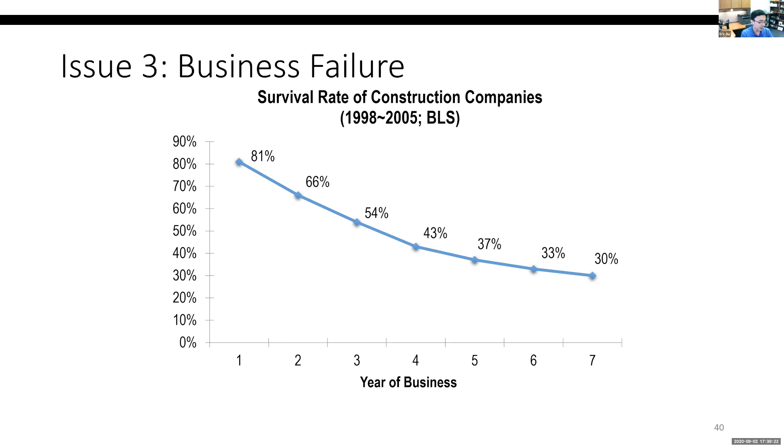Issue 4, claims. Once again, this is based on literature. 52% of construction projects will end up with at least one claim of some type. What is the last phase of a construction project? Lawsuit. So is that normal? No, it's not normal.

Profitability, all right, this is the magic. When a company tells you, hey, you know what, I'm so proud of my company, my annual revenue is $10 million, no, leave that guy immediately.

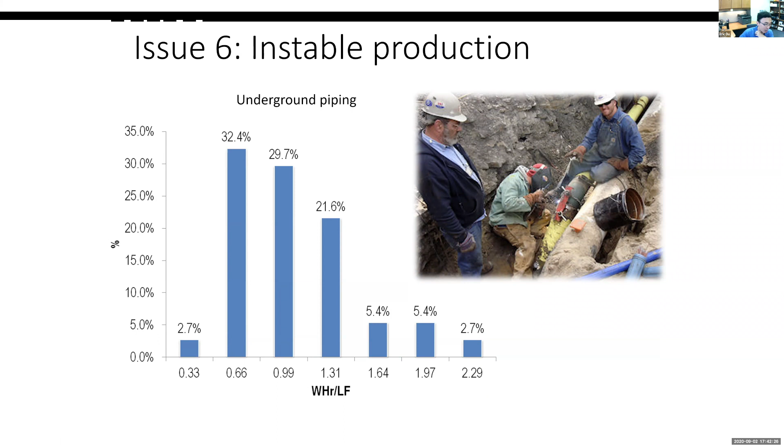This one shows the production rate for underground piping, how to bury the pipes underground. This is hours per linear foot, how long it will take. This is the distribution from 0.33 to 2.3. This is like 7, 8 times longer than this project. How would you predict the duration of a project? But where's the problem? Why are we seeing this so volatile production rate?

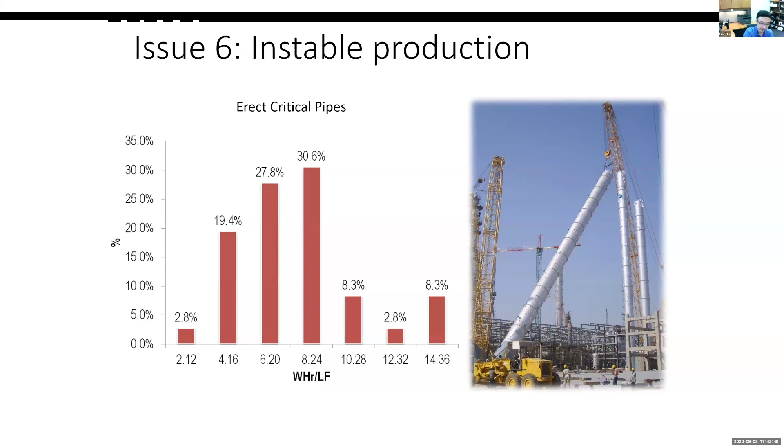This is an example, to erect the critical pipes, from 2.12 to 14.36. Once again, about 7 times — the slowest project is about 7 times longer than the fastest project. Why? I don't know, but there's a problem.

Safety, and not surprisingly, construction is still among one of the most dangerous jobs in the US and also all around the world. And whenever there's a recession, construction is always the most affected and the slowest to recover. Guys, we are experiencing another recession now. COVID-19 has significantly affected construction, even though we don't see that now because we still have a lot of contracts to finish. But I guarantee you, next year, you will see a significant decrease in the construction market because owners won't have funds to support new projects, since nobody wants to buy new homes, right?

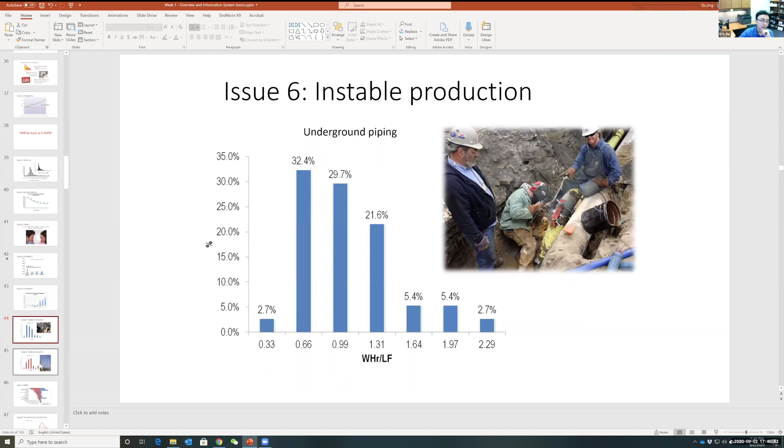All right, so guys, think about the problems we just talked about: decreasing productivity—we used to be a better industry than manufacturing in terms of productivity. We are experiencing significant overruns, significant business risk, a lot of lawsuits and claims, very low profit margin, very unstable and unpredictable production rate, very unsafe, easily affected by the economy, and very difficult to recover. No young man wants to go into the industry, and there's no innovation. Where's the problem? Like I mentioned, it must be some systematic problem. And personally, I have a lot of answers, I have to say.

Now think about how new technologies would improve everything, okay? How technology can be used as a solution to that. Before I talk about this, I think it's boring to just go over data and basics, so I'm going to adjust the sequence of my class and skip ahead to this: Industry 4.0 and cyber-physical systems. Why? I think we are facing a historical opportunity today to solve all the problems we've faced in the construction industry for more than a century. This is Industry 4.0, and when we talk about Industry 4.0, the major thing is called the cyber-physical system. So what is a cyber-physical system? I'm going to play this video quickly.

Your next refrigerator may know more about your diet than your doctors.

Can you hear the sound of this video? Okay.

How many objects do you have that are connected to the internet? About a decade ago, you probably would have said one or maybe two if you were an early adopter of smartphone technology. But today, well, I've got a work computer, a personal computer, a tablet, a smartphone, a video game console, a media player, a smart TV, I even have a smart refrigerator. Now, extend this trend outward, and what do we get? It's estimated that by 2020 there will be 50 billion objects connected to the internet—that's billion with a B. It's also estimated by the US Census Bureau that there will be 7.6 billion people alive at that time. So that means for every person, there will be 6.6 objects connected to the internet.

We're talking about a world blanketed with billions of sensors. These sensors are taking information from real physical objects in the world and uploading it to the internet. It's a world where your environment transforms as you walk through it, because technology you may not even be aware of is monitoring your every move. It's a world that's constantly changing all around us due to these sensors and the internet, and we call it the Internet of Things.

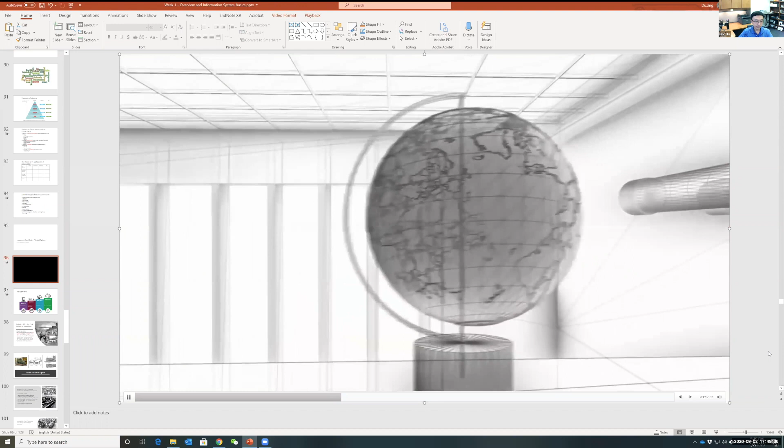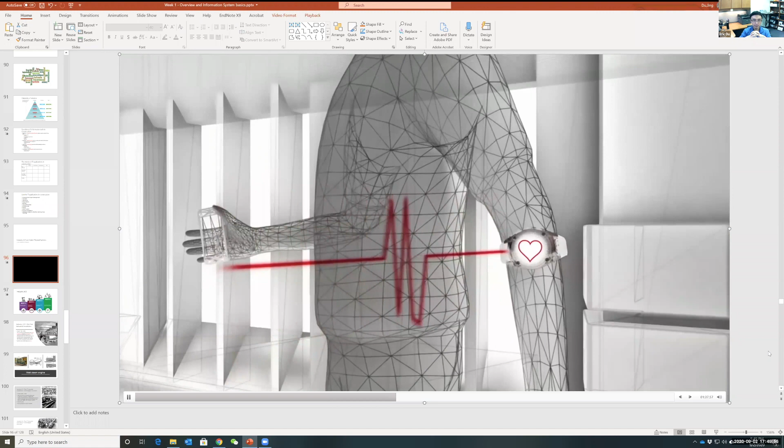Let's stroll into the living room of the future. Immediately, this room identifies you and taps into a cloud-based profile of preferences like climate control, music, lighting, and decor. Had a long day at work? The room knows, based on the calendar app on your phone and biosensors that detect stress via blood pressure and heart rate. So it turns off the rockabilly surf guitar you usually listen to and switches to more soothing classical music. From environmental sensors outside, and maybe even worn within your clothing itself, it knows it was snowing earlier, so the climate control begins to crank up the heat in anticipation as you walk through the door.

On the software side, we're talking about algorithms so sophisticated they may be able to predict what you want before you know you even wanted it. So when you walk to the refrigerator, it tells you not only what's in there, it tells you what you can make with the stuff you already have. And it's already telling you what's inside and what's the perfect meal based upon your mood, your activity level, and maybe even your weight loss plan for some of us.

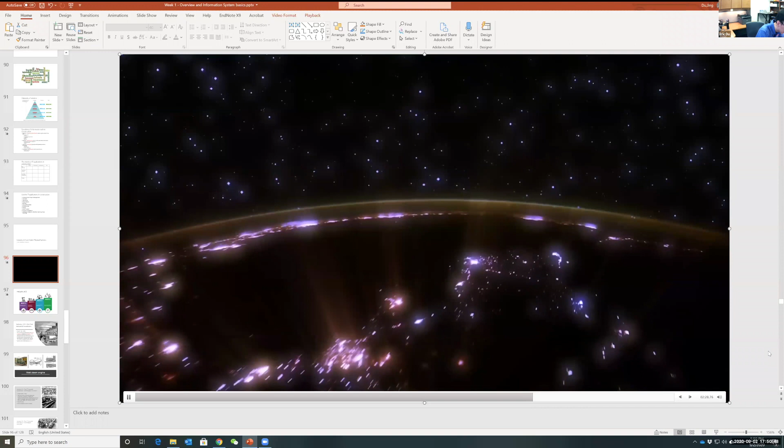As for how many objects could be connected to the internet, consider this: the latest version of Internet Protocol, IPv6, creates more potential addresses than there are atoms on the surface of the Earth. So we're going to live in a world completely filled with sensors, with data, reacting to us, changing every moment dependent upon our needs.

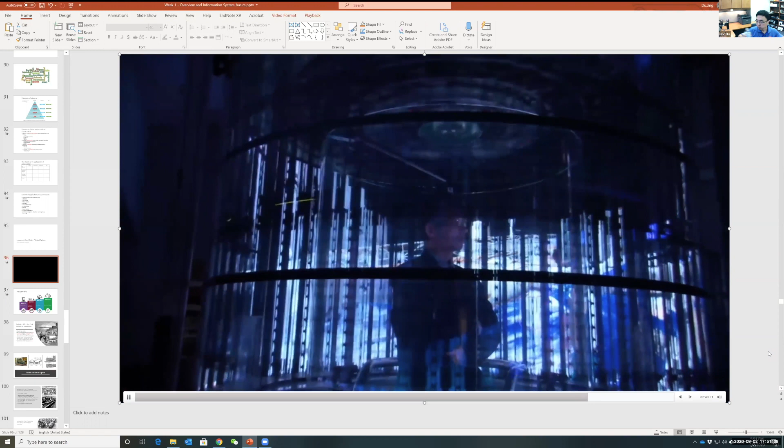I'm no longer going to be asking you, hey, what's your favorite color? What's your favorite music? I'm going to ask you, what's your reality like? I know what mine is when I walk into my house, how the world reacts to me, but how does it react to you? This is more than philosophy, more than technology. It is altering reality as we know it. And it's all regulated by the Internet of Things.

How many of you have heard about the term Internet of Things? I have, you have. So why is this important?

You know, Internet of Things are cyber-physical systems. I'm going to talk about them, they're actually presenting the same thing. It's actually the landmarks, the hallmarks for Industry 4.0. We have experienced so far 4 major industrial revolutions, and each revolution actually changed the entire human society. Industry 1.0, that's about steam engine. Industry 2.0, that's about mass production, especially the Ford T-model cars. Industry 3.0, that's about automation, robots, computers, and electronics. And Industry 4.0, that's about cyber-physical systems, Internet of Things, intelligent machines.

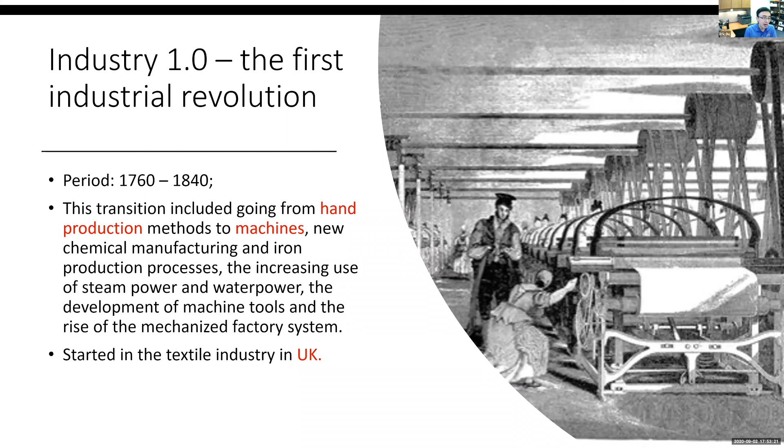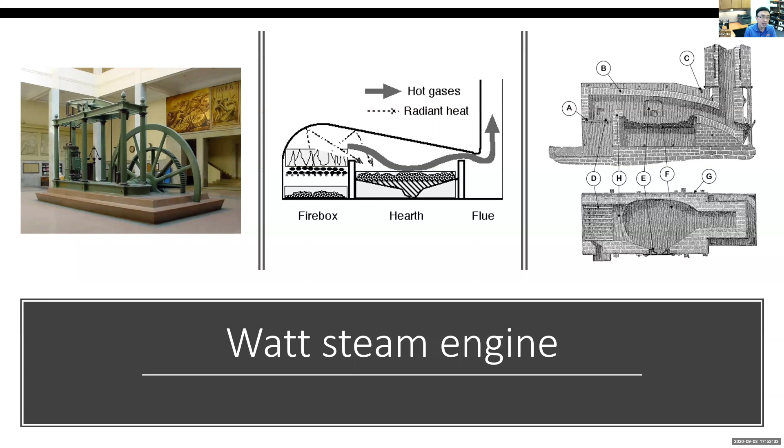It started in the UK in the textile industry, and this is a Watt steam engine. I think everybody learned this in high school, why this is so important. This is the first industrial revolution.

Industry 2.0, or the second industrial revolution, we call this a technological revolution - the first one we call the steam engine revolution. It happened right after the first revolution, in the period of 1870 to 1914. As you can see, each industrial revolution's pace becomes faster and faster, so the duration takes shorter. This one shows the advancements in manufacturing and production technologies that enabled the widespread adoption of systems such as telegraph, railroad networks, gas and water supplies, and the sewer system.

And we have this electrification - we start to use electricity. Around that time, the US started to use street lights, and everybody started to use light bulbs. Right after 1914, Americans started to use air conditioning. So that happened about 100 years ago, the second revolution, and the hallmark of that is mass production. What is mass production? This is a brilliant design, a new way to produce things. Can anybody tell me something about what mass production is?

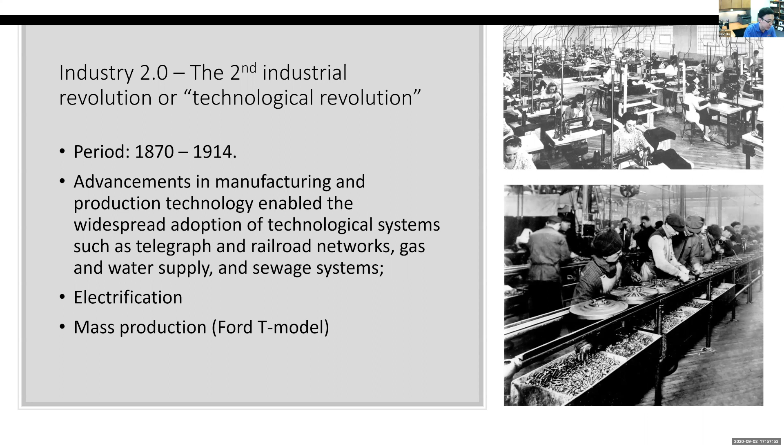Are you guys using iPhone? When the iPhone was popular around 2010, when the ringtone starts, everybody started to get their phone, right? Because everybody was using iPhone. There was a moment in history when everybody was driving the same car, same color, same type, all Ford T models. That's how successful it was in history.

That's the second. The third industry was after World War II, called the digital revolution. We're actually still in the process of the third revolution. It was a huge leap ahead, wherein we invented computers, automation, and robotics. We're replacing a lot of labor work with automation technology. So if we had to use one keyword to describe the third industrial revolution, that's automation, all right?

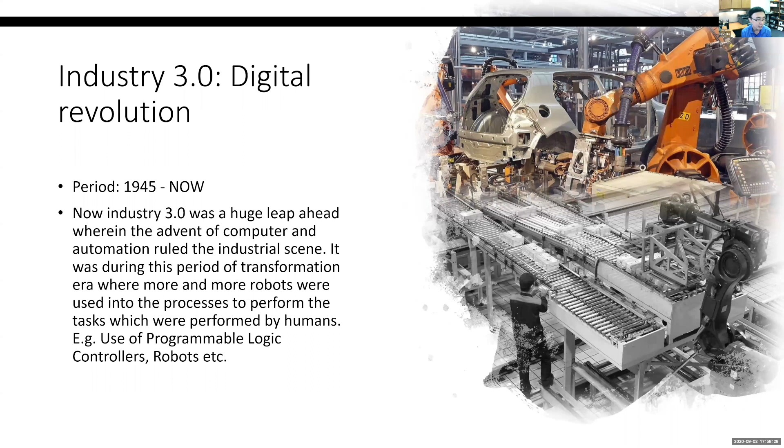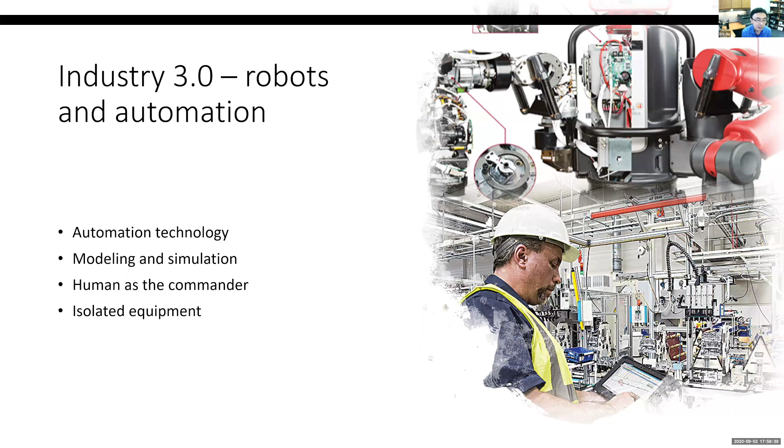So robotics and automation technology, modeling and simulation, humans as the commander, and we have isolated equipment to do a lot of things for us.

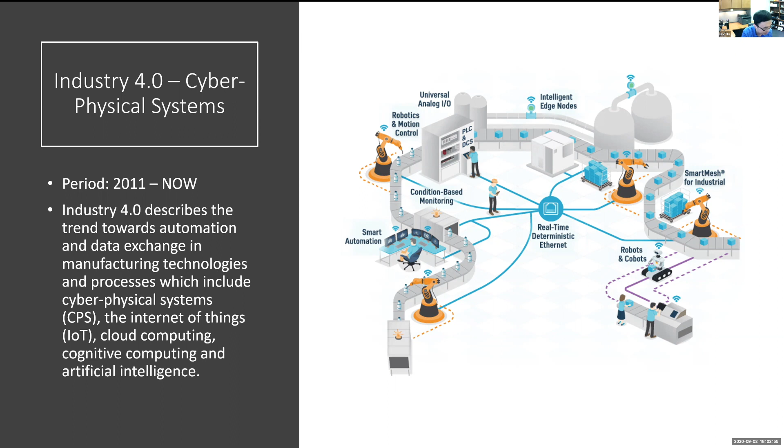So this is what a cyber physical system is. We have the physical system, which is the real world we are seeing now, the natural or human-made systems like roads, bridges, even natural things like rivers, governed by the laws of physics. Of course, we are in the physical world. The cyber system is actually not just software, not just computing, but a model of the real world, all the algorithms that calculate that. For example, if you want to optimize traffic flow, the algorithms for how to optimize the topology of the traffic network will be the cyber system, and the actual traffic network will be the physical system, right?

Cyber physical system is actually a closed loop. We send huge amounts of data from the physical systems to the cyber systems in real time, do the computing really fast on the fly, generate the optimal solution, and send it back to the physical world to change or intervene in the process. This loop happens every single second, forming a continuous loop, and this entire system is called a cyber physical system.

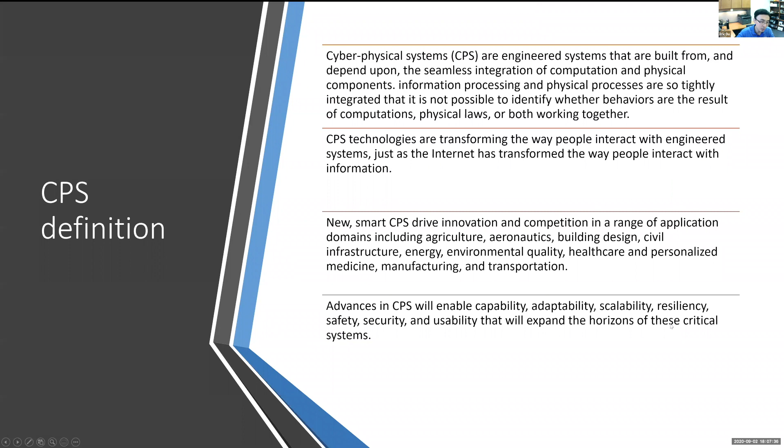Talking about the components of that, like I mentioned, CPS cares about physical world sensing and also the computation of that, but of course also the communication part. So there are 5 components: sensor network, and actuator. This is about collecting information from the real world. This is about changing the real world. So these two are the physical part of CPS.

And we need a communication network to exchange data. We need a computing server to do all the algorithms and all the optimization, and we also need storage to save the big data. All three components here are about the server. So: sensor, communication, actuator, storage, and computing. That's the 5 components of CPS.

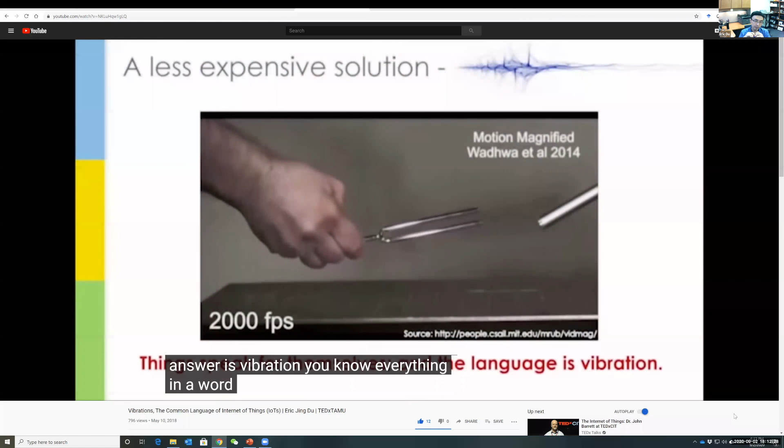So what else can we do? How can we reduce the cost? How can we talk to the things surrounding us in a different way? My answer is vibration. Everything in our world is vibrating. We just cannot see that. The podium, the chairs, yourself, and even this building, they are vibrating.

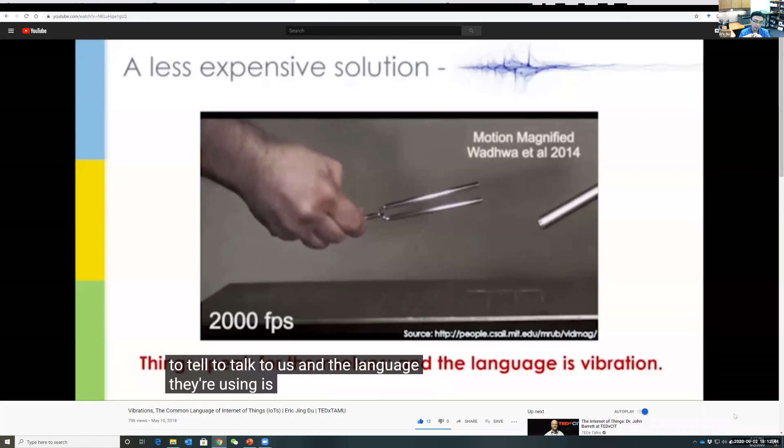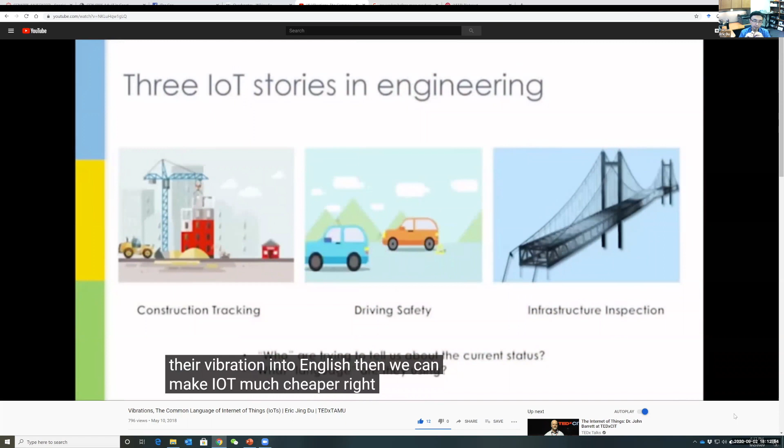So things surrounding us are trying so hard to talk to us, and the language they're using is vibration. That makes me think, if we can somehow translate their vibration into English, then we can make IoT much cheaper, right? So I would like to share 3 IoT projects I'm currently working on: construction tracking, driving safety, and bridge inspection, all engineering applications. The two big questions I would like to ask are: first, what are the things trying so hard to talk to us, to tell us what's going on? And second, how can we understand them?

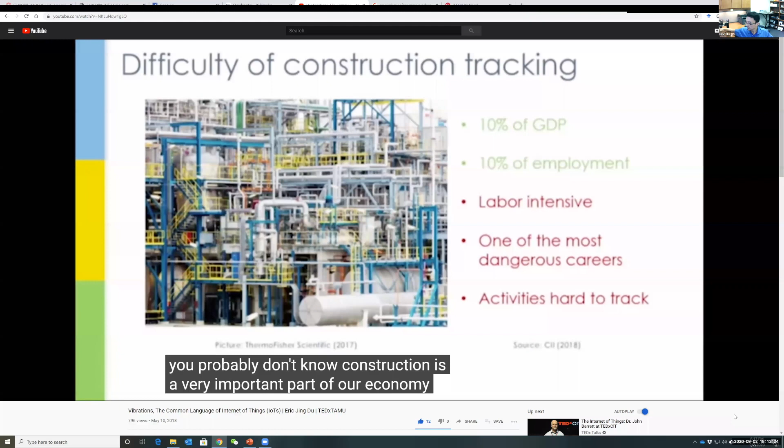Story 1, construction. You probably don't know, construction is a very important part of our economy, representing about 10% of GDP and 10% of employment. But on the other hand, construction is also one of the most dangerous careers in the world. It is super labor intensive. For a big project, you are expecting more than 1,000 construction workers working at the same time. And because of the complexity and uniqueness of construction projects, it can be difficult to track what's going on at the job site. Like this project on the screen, we cannot deploy cameras to track the construction activities. So at present, we usually just heavily rely on the manual reporting of construction workers.

That creates some huge problems about productivity assessment and, more importantly, safety. So what can we do? What are the things trying so hard to tell us what's going on a construction job site?

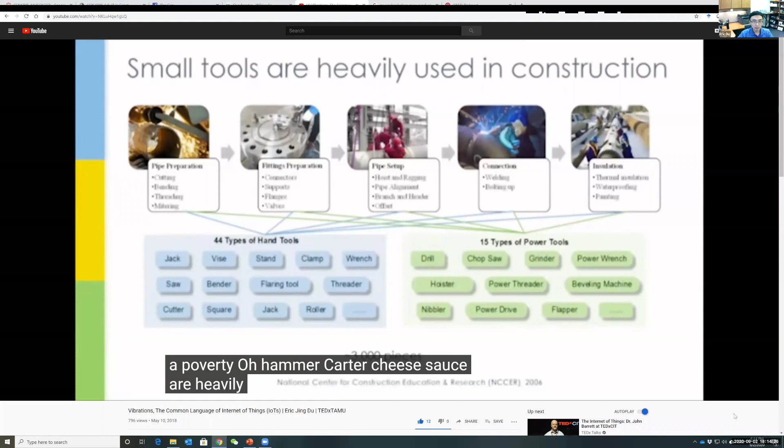Construction tools. Small tools like a power drill, hammer, cutter, chop saw, are heavily used in construction operations. For one project I was working on, there were more than 3,000 pieces of construction tools being used at the same time. Check this map yourself. Don't worry if you don't recognize the tools on screen, because I don't know their names either.

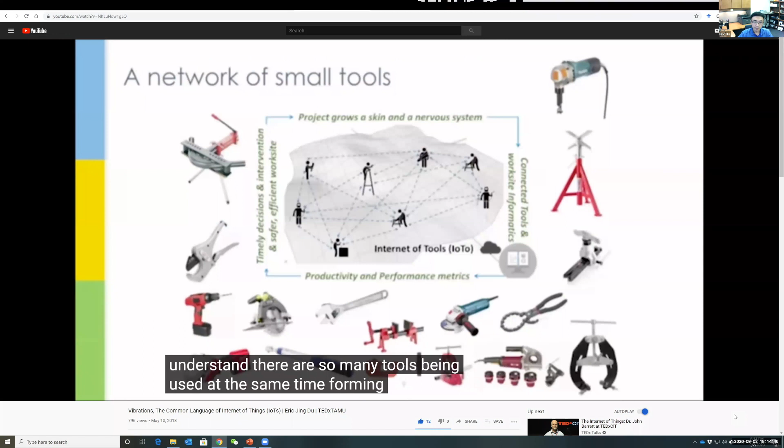We just need to understand there are so many tools being used at the same time, forming a huge Facebook social network. And if we can understand what they are talking about, then we can understand what's going on at the job site. So how can we do that?

Vibration. Different tools are vibrating in very different ways when you're using them. Even for the same tool, like a power drill, when you are drilling wood, concrete, and steel, the vibration patterns can be very different. So in order to identify the difference, we applied a mathematical model.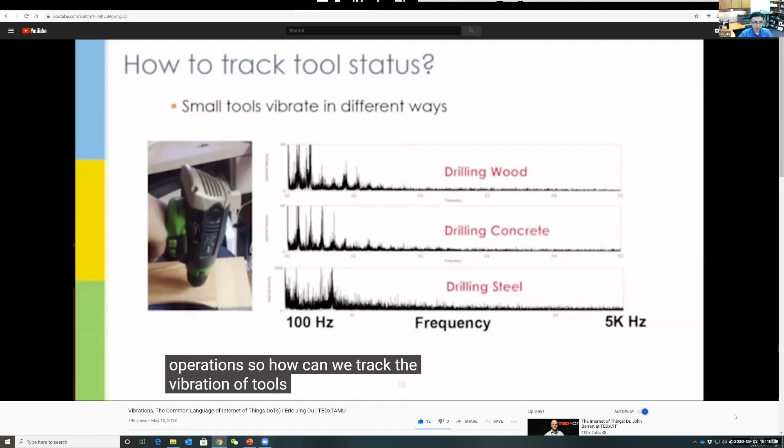So how can we track the vibration of tools? We built a system. This is the sensor we're using. It's very small, but super powerful. It can track 3-direction vibrations at a frequency of 5,000 data points per second.

And it's super cheap, only $2. You can buy it from Amazon. So we just attach this to different construction tools and collected a whole lot of vibration data.

The last step is to plot the Facebook social network of construction tools. Some tools are always being used for the same operation, some don't. It's kind of like, hey, the power drill, the cutter, and the chainsaw, they are good friends. They always want to go out together.

But that hammer, he's a weird person. Nobody wants to work with him. So if you check the social network of construction tools, as well as their individual status, then you can somehow predict what's going on at the job site with all the tool vibration.

Imagine, in the future, there will be a huge heat map in front of a project manager, so he can check what's going on in this area, what's going on in that area. Oh, that construction worker is doing stupid things now, let me stop him. So vibration is the language of construction tools.

The second story is about driving. Let me ask you a question. How many of you have ever driven on a bumpy road before? Great, everybody in the room.

In fact, 22% of US roads are considered in poor condition, and the cost to fix the problem is estimated to be $170 billion. Unfortunately, every year more than 35,000 people die on US roads, and about 14% of accidents can be tied to poor road condition.

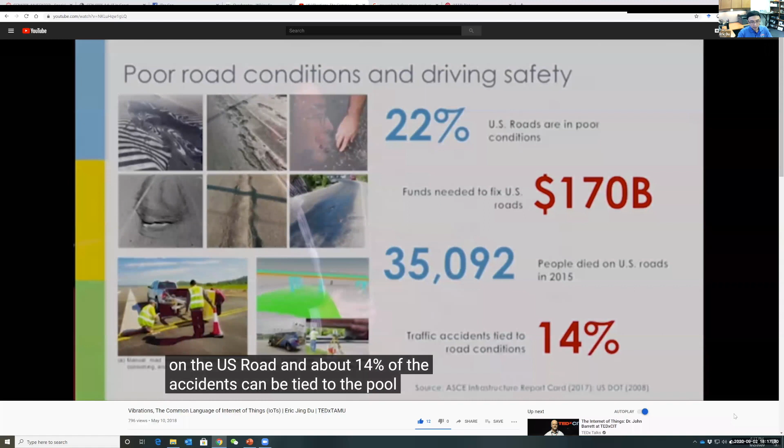So it's critical and urgent for us to inspect road damage, right? At this point, we do that heavily with a manual process. We send people outside, usually just once a year, to visualize the damage, or we use very expensive laser scanners to build 3D models. The frequency of data collection is not satisfactory at all.

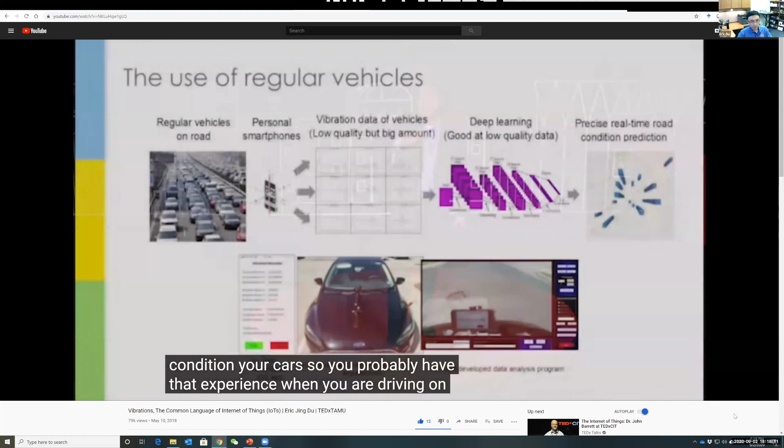So what else can we do? What's plan B? What are the things trying so hard to tell us the road condition? Your cars. You probably have that experience: when you're driving on a bumpy road, your car tends to vibrate badly. But if it's a smooth road, the driving can be really enjoyable.

So if we can collect the vibration of the cars, then somehow we can predict the road condition. To deploy sensors on millions of cars can be very costly, so this time we decided to use a really cutting edge and very uncommon technology: your phone. Everybody is carrying a phone while driving, right?

So you either throw it to the passenger side, put it in your pocket, attach it to the windshield, or are texting while driving, which is totally illegal. So please don't do that.

But the phone has a really powerful vibration sensor. It can sense 3-direction vibrations, and it also has a gyro sensor that can collect the pose of that. So the idea is to develop a free app, share it with millions of US drivers, and ask them to share their data with us. Then we have millions of data collectors every second.

So in the future, when you open Google Maps, you will see another layer called driving comfort, and it will highlight all the bumpy roads.

In order to test the concept, we had to do some pilot studies. Unfortunately, Texas is doing such a great job maintaining its roads, we couldn't even find enough potholes, so we were so disappointed at Texas.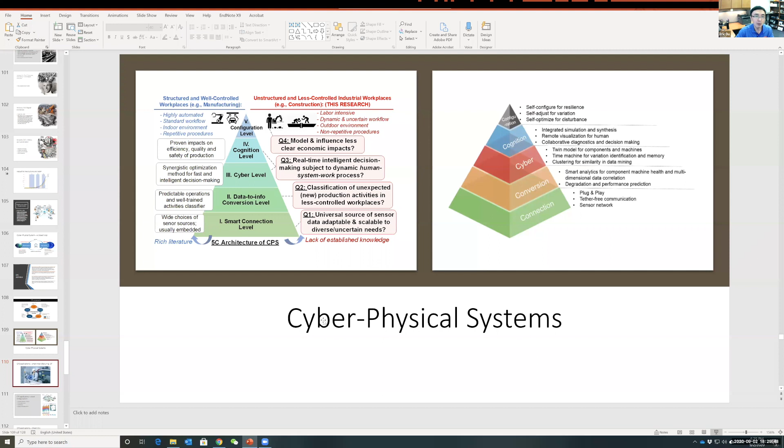All right, so talking about the CPS application, I want to show you several videos. This is the biggest CPS application we know, manufacturing.

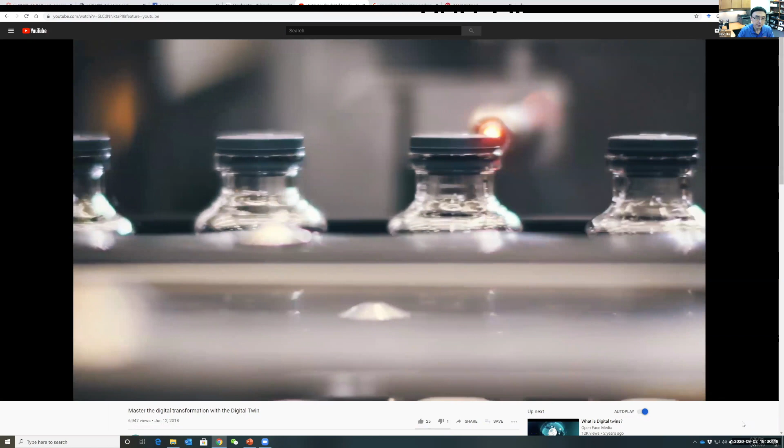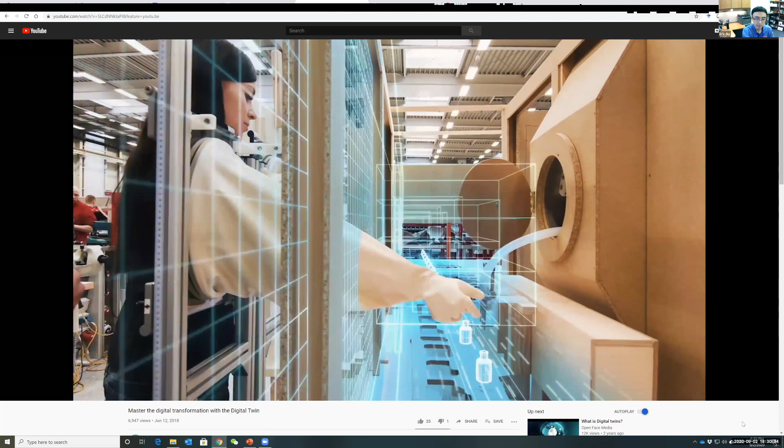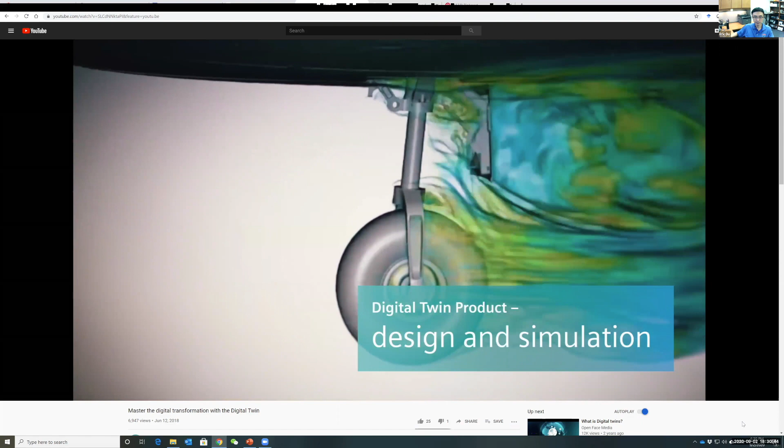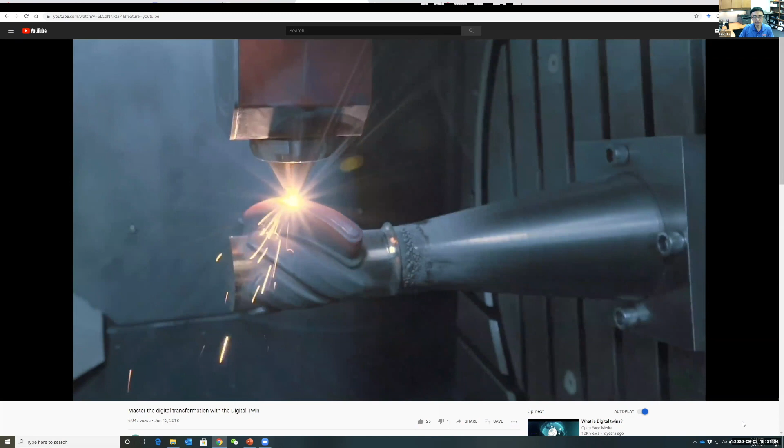What is it that helps manufacturing companies stay ahead of the competition? The key is digitalization. With its help, we can synchronize work steps and optimize entire value chains. This turns companies into digital enterprises. But what does that really mean? It means optimizing ideation processes and planning with the support of a digital twin. Design products digitally and simulate their characteristics virtually. Plan, simulate, and engineer production facilities digitally. Evaluate and assess the performance of real production and products in real time, in order to optimize both continuously. This is only possible with a holistic approach. The Digital Enterprise Suite.

Siemens. Ingenuity for life.

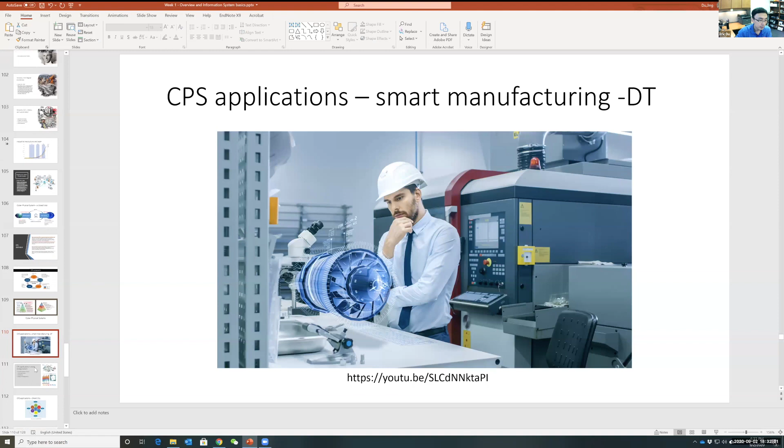Smart energy systems - we're talking about smart power grids that can sense the consumption in each household and run a top-down optimization algorithm to see how to allocate energy and power use. That's a smart energy system.

Smart city. Let me show you this interesting video about how CPS is changing the view of the future city.

Just how smart is your city? Chances are it's getting smarter by the year. Many governments around the globe are racing to infuse technology into just about every aspect of their city's operations, including public transportation, IT connectivity, water and power supply, sanitation and solid waste management, efficient urban mobility, e-governance, and citizen participation. And it does this using every buzzword imaginable, from big data to the Internet of Things.

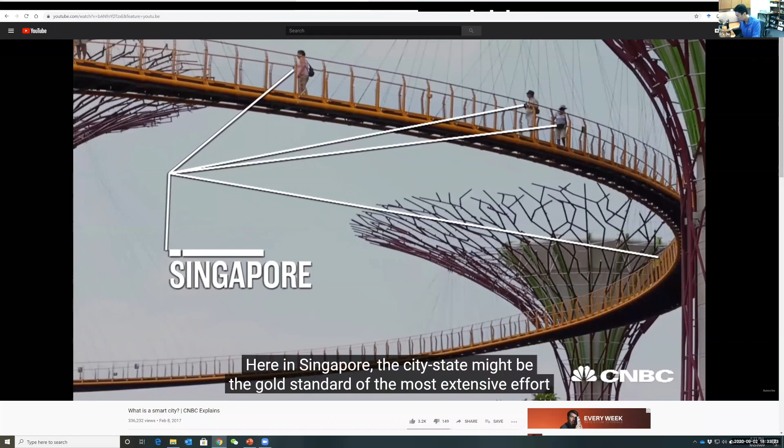So how does a smart city work? Let's look at three examples. Here in Singapore, the city-state might be the gold standard of the most extensive effort to collect data on daily living. The government is now deploying systems that can tell when people are smoking in prohibited zones or littering from high-rise housing. Singapore launched its Smart Nation program in 2014 and will add more cameras so the government can effectively monitor crowd density, cleanliness of public spaces, and the exact movement of every locally registered vehicle. Much of this data will be fed into an online platform called Virtual Singapore that gives the government access to how the city is functioning in real time.

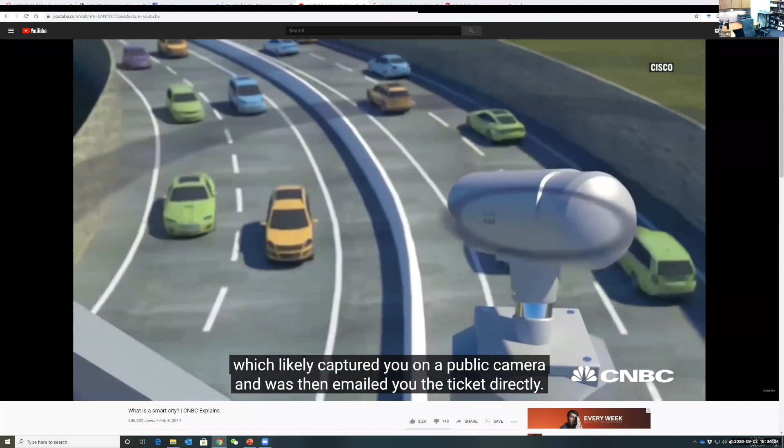It could help the government predict how crowds might react to an explosion in a shopping mall, or how infectious disease might spread. Over in Dubai, more than 50 smart services from 22 government entities have been rolled out as part of the Smart Dubai initiative. Using the government app Dubai Now, you can pay a speeding ticket captured on a public camera and emailed to you directly. You can also pay your electric bill, call a taxi, track a package, find the nearest ATM, renew your vehicle registration, track a relative's visa status, and report a violation to the Dubai police.

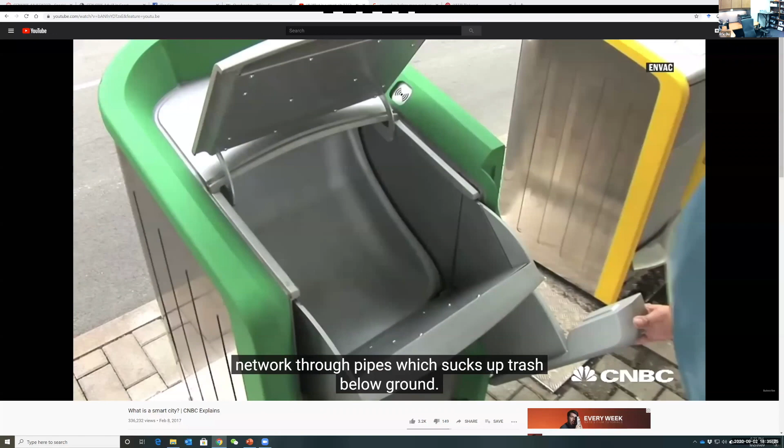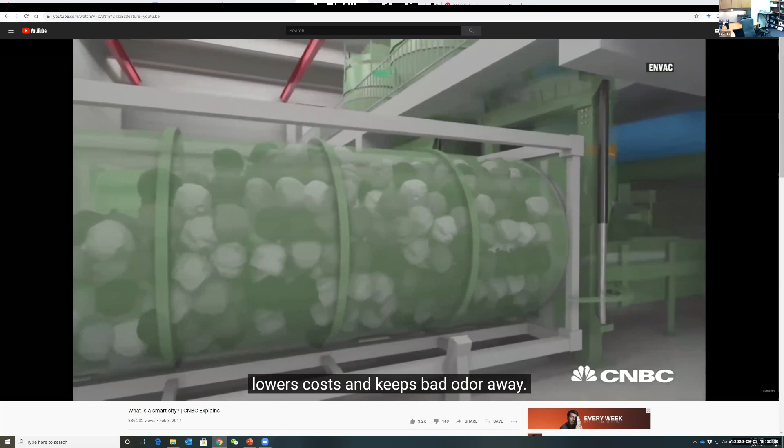Now head over to Barcelona, where one research firm estimates the city will save billions of dollars a year in energy costs by installing smart systems. Number one, smart streetlights - public lighting that dims when there's no activity but brightens when sensors detect motion. Number two, parking sensors - instead of driving in circles, drivers get real-time information on an app that locates free parking spots, using street curb sensors with lighting and metal detectors. And finally, garbage sensors - compact drop-off containers with a vacuum network through pipes that sucks trash below ground, lowering noise pollution, costs, and bad odor.

Juniper Research estimates that by 2021, cities will save nearly $19 billion by making their cities smart. But to save money, sometimes you have to spend it first - the global smart city market is estimated to attract $15 billion by 2021, just for software. So companies from Microsoft to Cisco are aiming for a piece of it. In Singapore, Uptin Saiidi, CNBC.

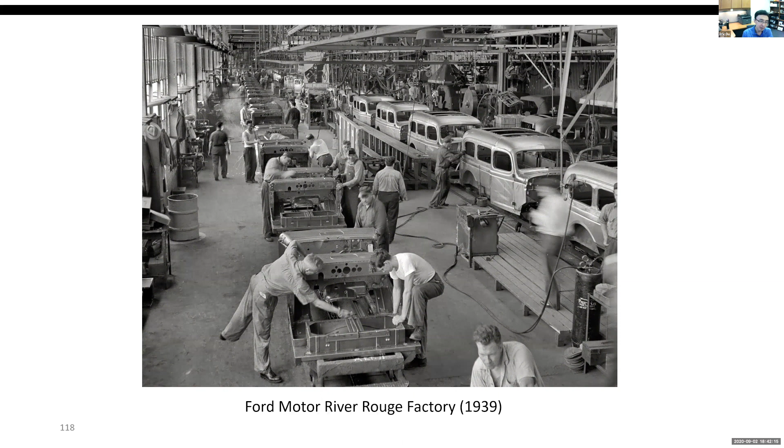Automation or augmentation? This is a picture of the old Ford manufacturing factory taken in 1939. This is a picture taken in 2014 at one of Tesla's facilities. What's the difference? Anybody? Difference of labor and machines. Yeah, so automation, right?

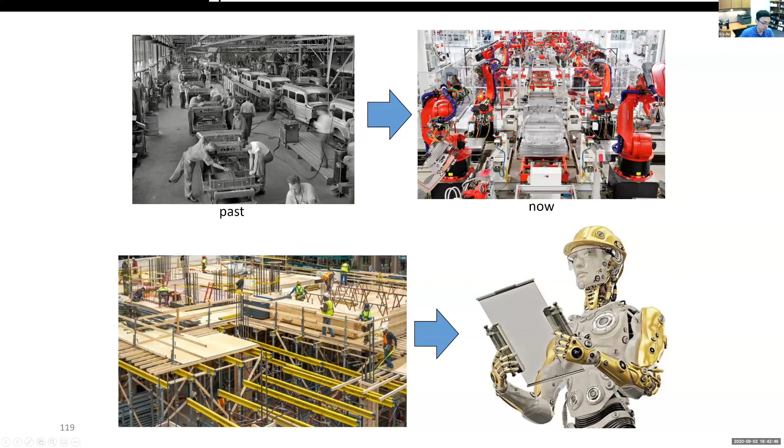If that is the case, this is what current construction looks like. So what does future construction look like? Of course, automation and machines, right? Wait a second - are these all only machines? What's this? What's this? What are these things? They're human beings, right?

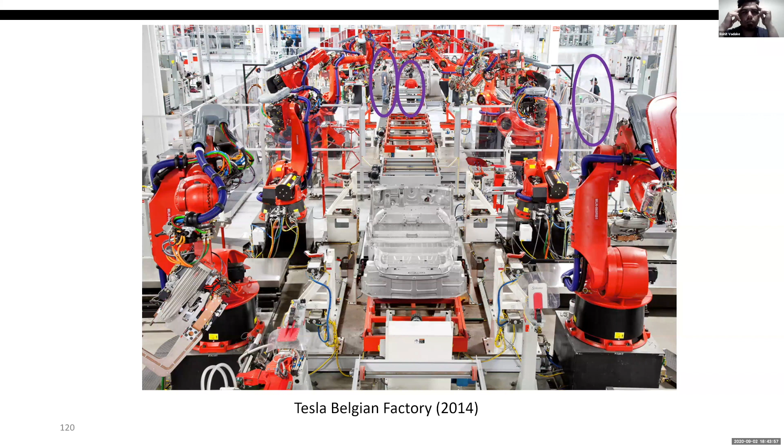In fact, if you check the news, Elon Musk said that last year, or in 2018, he was considering downsizing the use of robots. Why? I don't know if I have the news here, but there's news - we still need a lot of human involvement in current modern production systems. Human intelligence is still not replaceable with machines. Like what you see here, machines doing repetitive work, but what are the human guys doing? They are the boss. They are telling the machine what to do. Who is still playing the most important job here? Who is still making all the decisions? Who is still playing the intelligent part of the game? Us, not the machine.

Actually, in Europe, they already observed the human bully behavior. When you know the other car is an autonomous vehicle, what will you do? People tend to cut the way, because they want to see how the autonomous vehicle is reacting to that. Unfortunately, we don't quite understand the implication of that.

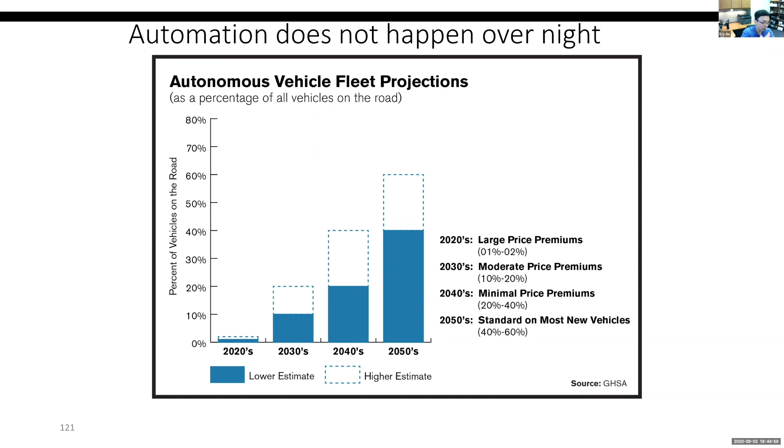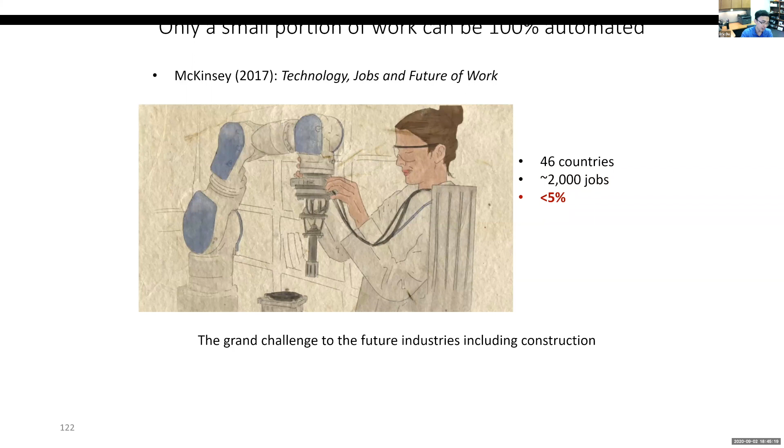They surveyed more than 2,000 jobs in 46 countries, and they found only 5% of jobs can be totally automated. What does that mean? 95% of jobs will still be human-machine collaboration.

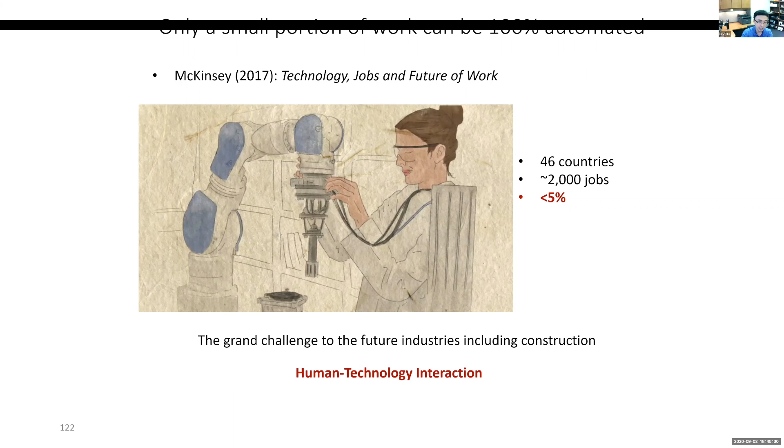The grand challenge to the future industry is human-technology interaction. This is NSF's 10 big ideas. Number 2 is the future of work and the human-technology frontier: understanding how constantly evolving technologies are actively shaping the lives of workers, and how people in turn can shape those technologies, especially in the world of work.

And this is the UK Government Construction 2025 report. They say we need 3 strategies to advance the construction industry. Number 1 is smart construction and digital design.

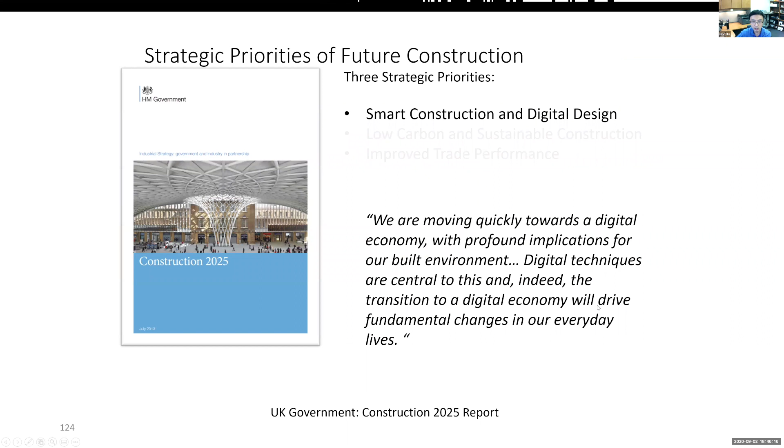We are moving quickly towards a digital economy, with profound implications for our built environment. Digital techniques are central to this. Indeed, the transition to a digital economy will drive fundamental changes in our everyday lives.

So here is the ongoing debate: automation or augmentation. We have seen two opinions. One shows that we need to totally replace human beings in work, including construction. That's why we talk about autonomous vehicles, smart communication systems, smart power grids, smart transportation—everything smart and automated.

Or another group of people say, no, we need to think about how technology can augment us. That's why we say augmented perception, language understanding. Think about natural language processing—it's about the machine understanding us, but still us making decisions and giving orders, right? And also aided decision making.

Now the discussion point I want you guys to have is, which side do you believe? I'm not saying that we should think about human augmentation—I'm asking your opinion. From today, in about 30 years, what would the future look like, including in construction? Automation or augmentation? Anybody?